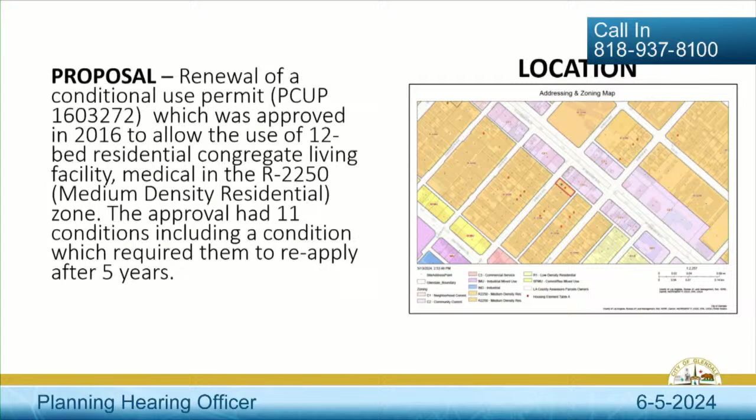The location of this site is again on Roberta Avenue, 1058 Roberta. It's in between Glen Oaks Boulevard and San Fernando Road, both of which are commercial major thoroughfares. The site is surrounded by other multifamily development, and I highlighted the site specifically in red lines.

I have photographs of the subject site. One is the view from Roberta Avenue, and the second photo is again from Roberta, but from the alley direction. As you can see, it's a two-story building. For the site plan, there are no changes proposed to the site plan or to the building.

The lot is a corner lot, approximately 8,787 square feet. The site was developed back in 2019 as a 5,600 square foot, two-story residential congregate living facility, medical, with 4 parking spaces.

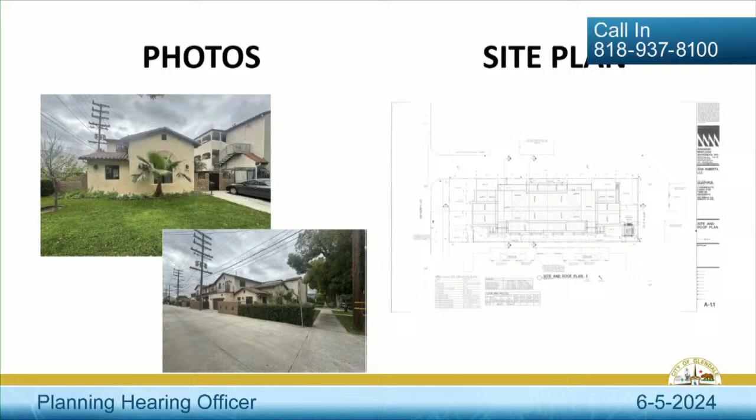I put the first and second floor plan just for your information. The first floor plan has 6 bedrooms, a common living and dining area, and 2 two-car garages, which are accessed from the alleyway. The second floor plan shows 2 additional bedrooms and 2 sitting areas.

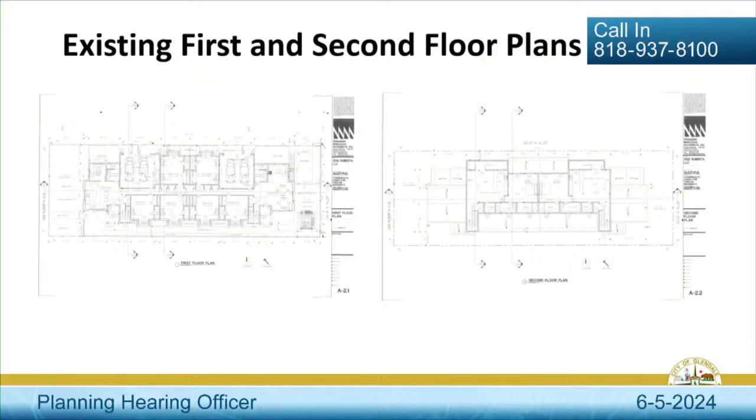Again, this is a site where it's a corner property. It has an alley to the north of the subject property and to the east. Under the California Environmental Quality Act, CEQA, this application is exempt under Class 1 existing facilities because there is no expansion of the use or operation and no expansion of the building itself.

According to our zoning code, 4 required findings should be made, and the burden of proof is on the applicant. I will read the 4 required findings.

Number 1, that the proposed use will be consistent with the various elements and objectives of the general plan. Number 2, that the use and its associated structures and facilities will not be detrimental to the public health or safety, the general welfare, or the environment. Number 3, that the use and facilities will not adversely affect or conflict with adjacent uses or impede the normal development of surrounding property. And number 4, that adequate public and private facilities such as utilities, landscaping, parking spaces, and traffic circulation measures are or will be provided for the proposed use.

These findings were properly addressed back in the 2016 conditional use permit application, and the same with this application that was filed.

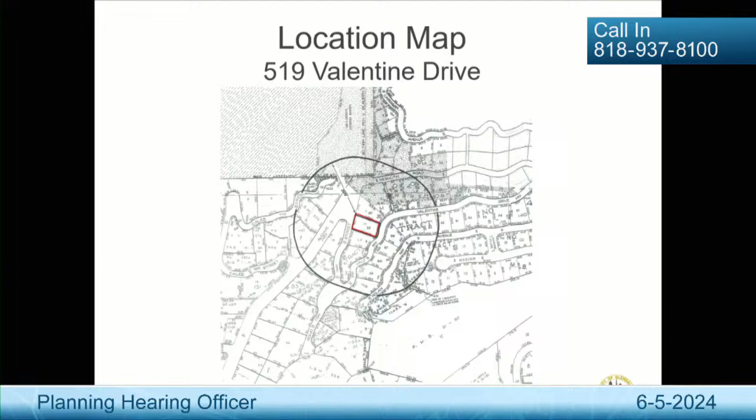This is the lowest floor. So you could see this from Rohr, but not from Valentine.

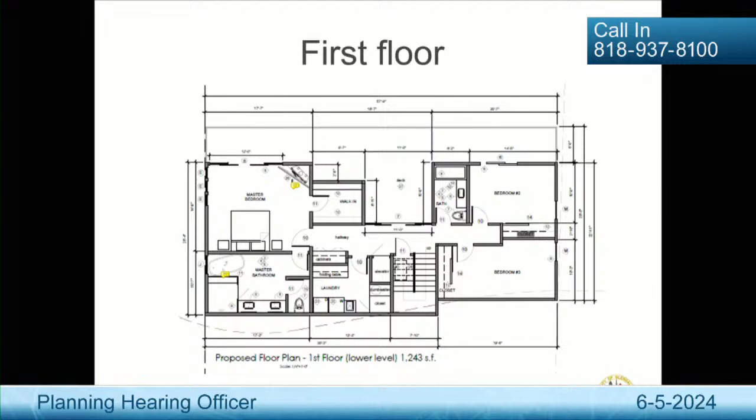The second floor is the main living floor, with a kitchen, dining room, and living room. And then the top floor, which is visible from Valentine, contains a garage, a bedroom, and a study.

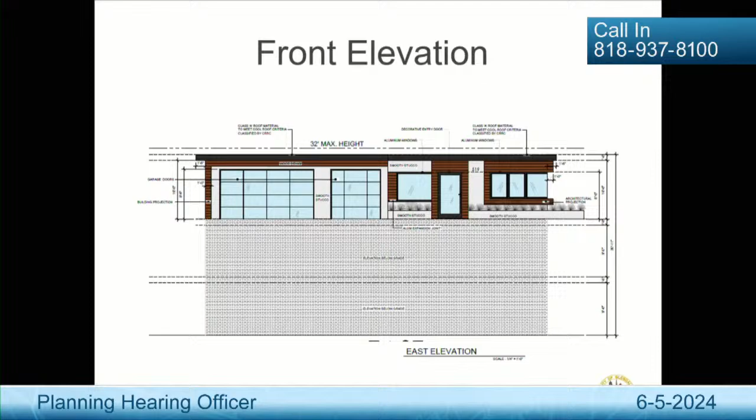And then I'll conclude with the variance findings. Staff believes that findings can be made for each of the variances.

With regard to the first finding, that strict application of the provisions of the code would result in practical difficulties and unnecessary hardship, inconsistent with the general purpose and intent of the standards. Approval of a reduced street front setback will allow for reasonable development of the site in a manner compatible with the surrounding neighborhood and consistent with the hillside design guidelines. Given the street and garage characteristics and the city's desire through the hillside design guidelines to minimize grading and mass and bulk of houses, which a longer driveway would exacerbate, requiring a code-compliant driveway length would be practically difficult and an unnecessary hardship. So that is the first finding for the setback variances.

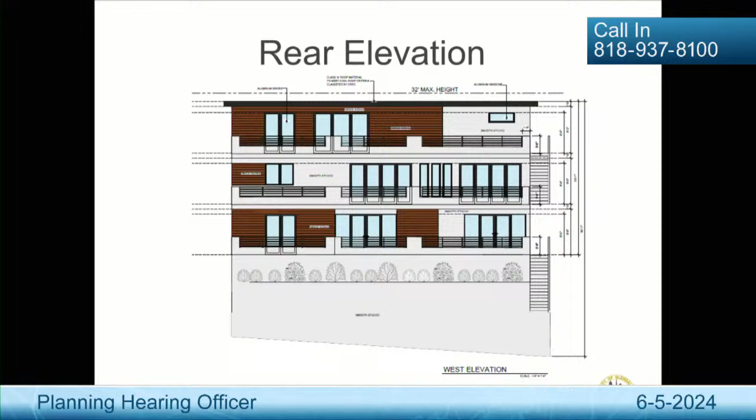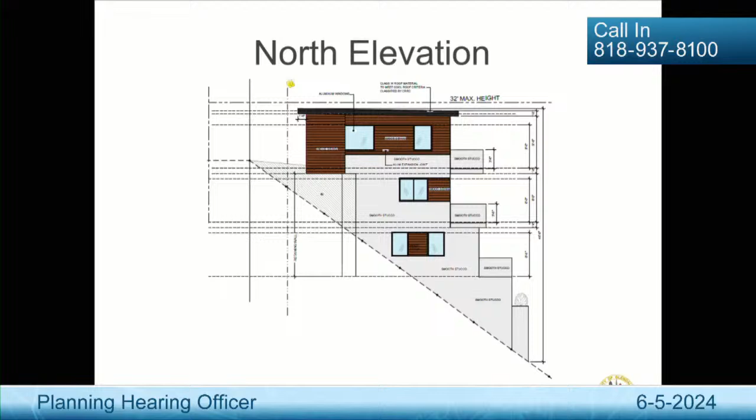So proceeding with my presentation. The intent of restricting retaining walls in the front yard is to provide open streetscapes and reduce overall grading. Because of the site topography and the landscaping that will be required, the retaining walls will not be readily visible from Valentine Drive, and the streetscape will be open. Grading will increase to support the driveway in the front yard. However, overall, only the eastern 25% of the site will be graded to enable construction of the house as well as the driveway in the yard. The western approximately 75% of the site will not be graded.

Moving on to the second variance findings, there are exceptional circumstances or conditions applicable to the property involved, or to the intended use and/or development of the property, that do not generally apply to other property in the same zone or neighborhood. Because the subject site along Valentine Drive has an S-shaped curvature and the site characteristics differ from many developed lots, many R1R developed lots within the city, the S-shaped frontage is unique and distorts the street front setback area.

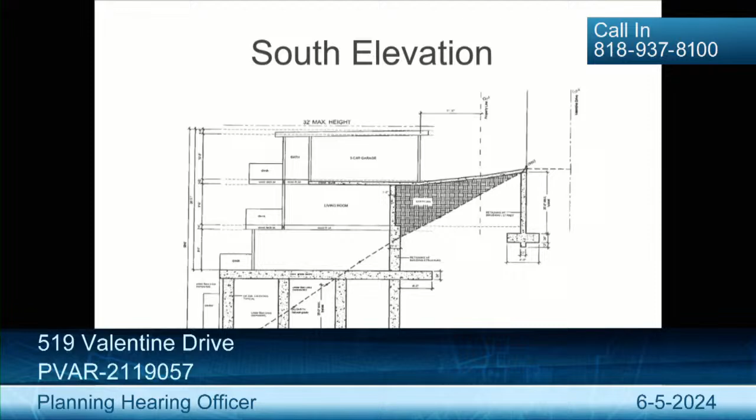So it works for part of the construction, as well as the driveway, the courtyard, and all of that. I didn't find a reference cut, but I was able to understand where it's from, and it's obvious from the garage. Once Roger has the site plan available, I want to reference other areas where the section cut isn't provided. But since we're on this slide, I'm going to shelf the retaining walls discussion on the north part, because the retaining walls aren't shown on the elevations—we'll bring that up later since we're dealing with technical difficulties.

One of the comments I read from Public Works was that there were to be no retaining walls in the public right-of-way. And I noticed from this section here, you do have a retaining wall in the public right-of-way. So if you look left of the property line, right to the property line, you have a retaining wall there. Do you know if that's possible to achieve? I just want to bring up this comment from Public Works.

Yeah, I just received that earlier today. This is the ideal situation to get proper equipment and properly excavate that—sorry, that is the proper way to do it so we can excavate and get the retaining wall built for the home. It's the whole length of the front of the building. So we would have to look at other options, but that's the minimum we would ask for.

Just for clarity, the zoning code doesn't have any purview into the street or the public right-of-way. This might be a pretty important point, if this project were to move forward, when you get to plan check—that you're well aware of this condition from the Public Works Department. I wanted to bring that up because I understand you're filling in this area to create a front yard and a driveway to the house, and I understand why that's necessary. We would address that with Public Works and maybe have to take that same footing and pull it back to keep it inside the property line, which is probably what we're going to have to do.

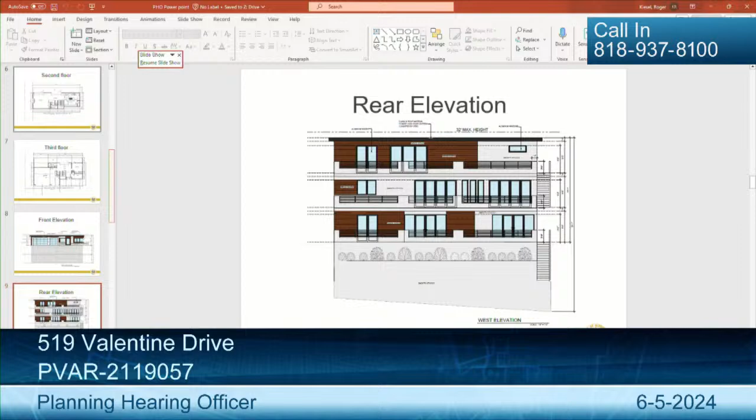Particularly, I wanted to ask if that was necessary, if we can eliminate as much of the requests, because it would help you out in compliance with the landscape within the front setback. Once again, the code does require 50% landscaping in the front setback, and with the 3-car garage and a wide driveway, it does take up a lot of that as well.

I wanted to ask maybe details, thoughts about that retaining wall. Are you open to maybe reducing some of the requests there? I'm open to doing that, yes. And I think we can achieve that with the structural and the geo report, the soils report is the reason why we were asking for that 13 feet. So I think for just the courtyard portion, yes, we can.

Okay. And of course, the retaining walls, this is a very challenging site. And I'm definitely acknowledging that. And I do want to talk about, I think the real request of this 13 feet has to do with the driveway when viewed from the south elevation.

Would you mind pulling up, I think that's sheet A7, Roger? Do you want it on the PowerPoint or the, that's fine. If you can just pull it up and maybe enhance it. The north elevation? No, the south elevation.

So on the south elevation here, I can see that I think what you're asking for is the retaining wall for the driveway there. Now I'm going to call it to the right side of the screen. Is that correct? Where the, correct. That's where the 13-foot retaining wall is shown on the section.

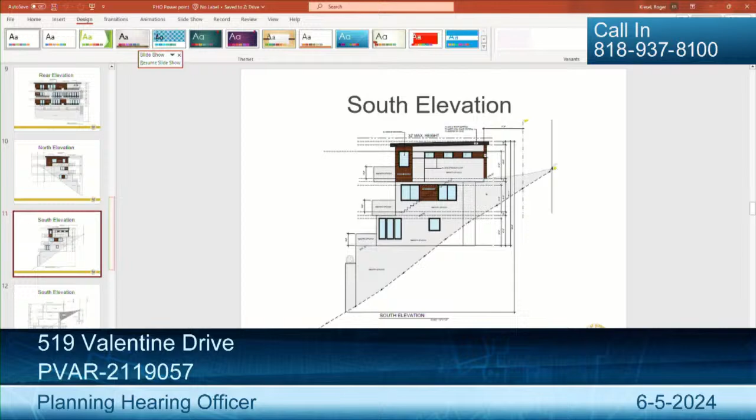Are there other methods that people have done to eliminate retaining walls as much as possible, as far as creating like a bridge? Have you investigated that, just to eliminate, because I know there's going to be a stairway access that may come into play. I just didn't fully understand everything, and I just kind of wanted to hear from you, what your thought is behind this, why is it designed that way?

And once again, we're going through the findings, are there exceptional circumstances? Are there ways to avoid a variance? Because if we can, it's worth speaking about.

Well, based on our soils report, I think that we need that retaining wall variance. We're allowed 5 feet, so due to the topography of that, I don't think that we can utilize that depth.

Also, again, in building the retaining wall for the structure of the home, that is what our structural team came up with. So when we talk construction about retaining walls for the building, that would just be an impact wall to us, not a freestanding retaining wall. I understand what you're saying.

I'm just talking about the driveway and potentially, I know the stairs go down the side, is that correct? On the elevations and on the floor plans, there is a stairway that's supposed to be going down on the south portion of the lot, and I see that there is drawn staircases that go across the second level. Is that correct?

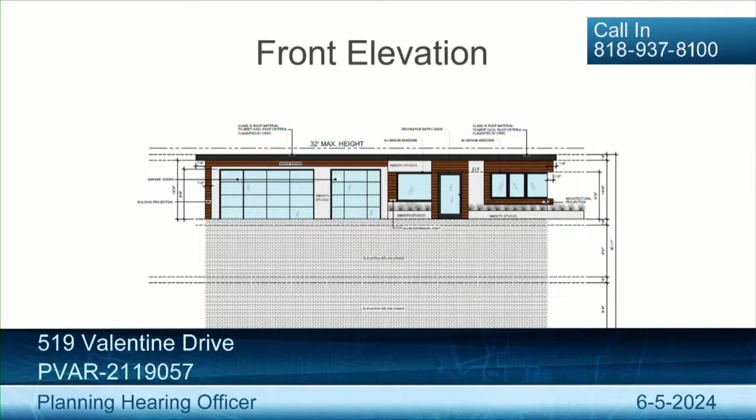I know you have a 3-car garage design, and the zoning code only requires 2 parking spaces for a house of this size. Roger, what I wanted to ask about is the parking garage for the one bay door. So we have the 3rd floor, and I know the one bay.

If this was truly a parking space, it would definitely help out some of the concerns of the neighborhood. I was wondering, is it possible to relocate that elevator, maybe where the bathroom is, to truly get another car to park in there? We could do that, yes.

I'm acknowledging your house is, from a required parking space standpoint, overparked. But I think it would be helpful for the neighborhood. It's not going to be required, but it seems like you had the intent of having a 3-car garage, so if we relocated that it would be helpful. That is the reason why I requested a 3-car garage.

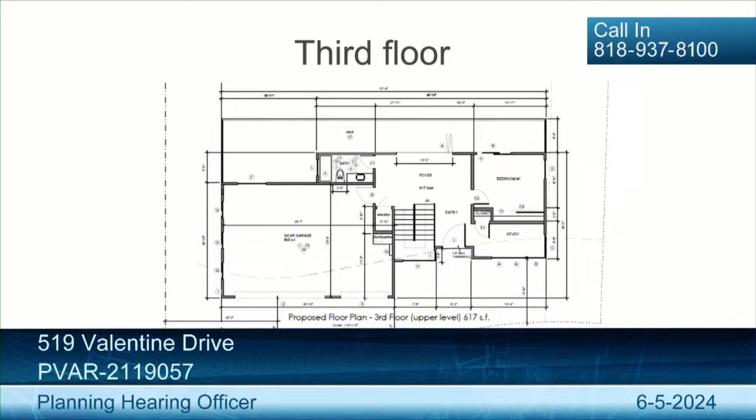I can see that the elevator is projecting into it. I think that would be a nice gesture to the neighborhood, and it would even help you during the holidays when people come over. That's the reason why I requested a 3-car garage.

I'm going over my notes, so I apologize for the pause here. No worries.

The only one I'm analyzing right now is the retaining walls in the street front. If we eliminate it, of course there has to be areas for you to walk from the driveway or the street to your front door — we have to be reasonable about that. If we eliminate the front yard, especially in the north part, we would eliminate much of the retaining walls that would show up on the north side.

It seems like you are intending to eliminate the stairways on the south side, is that correct? Yes, due to revising the understory. Okay, we got it.

If we eliminate the front yard, it will help you out with your 50% landscaping requirement, because I think it's still achievable. You have approximately a 70-foot wide lot, and if you have a 30-foot wide driveway, that's almost 50%. If you eliminate that front yard, it will bring you to compliance as far as landscaping. The flat work — that's not a problem, bringing the courtyard back, not a problem.

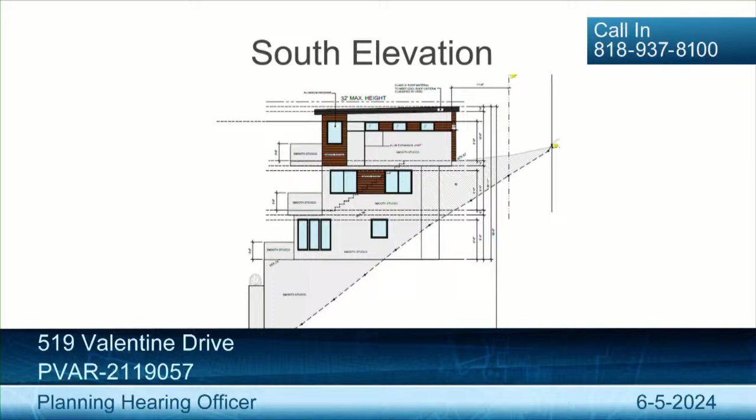I did take time to drive around the neighborhood. I do see some houses that aren't 5 feet below top of curb of the street, maybe a foot or two, and I don't know how much we're really going to gain here, because it is a very challenging site with exceptional circumstances. I can see that for the height, with the extreme slope, the average cross slope of the lot, it's very challenging to satisfy the hillside design guidelines without a reduced setback.

I'm in agreement there. I'm just talking about and going over retaining walls, and it will help in my thought process for design review as far as hillside design guidelines and reducing massing. But I'm kind of thinking out loud here. That's all. I don't have any further questions.

Is there anything else you folks would like to add? I think that's it. For the retaining wall on the south side, we will try, when we get to that point, to match it with hillside plantation, trees and stuff. It may not even be visible because the house next door will block it, so I think it's a good way of hiding the wall, if indeed we need to.

Absolutely, I think landscaping would help out too. Yeah, we can do something on the wall, grass, or that. I've seen work with Roger during the design review application as far as landscaping, but we're just talking about development standards for height, setback, driveway width and so forth. I do appreciate those gestures.